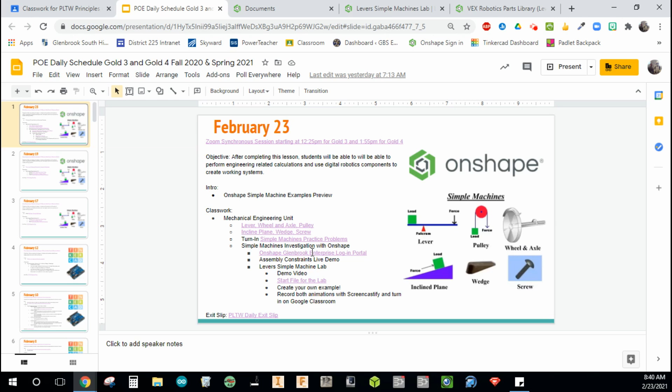So when I click on this link, you'll see it'll take you to glenbrook225.onshape.com. When you follow that link, that'll bring you to the enterprise login portal. If you were just to go to onshape.com on your own and try to log in, it would work, but that's going to end up being your own private account, your own private side of Onshape.

So please bookmark this, that way you don't have to come back to the daily schedule every time you need it. Bookmark it, add it to your browser links up here at the top of your screen, because you want to access Onshape through this link every single time.

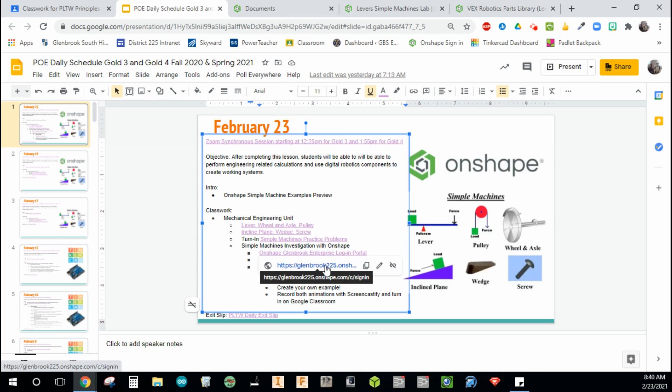When I click on there right now, it's actually going to redirect me directly in because I already have some tabs open, and I wouldn't like to start over with that. In any case, when you click on that link and you get logged in, your landing page should look like this. You'll be on the Documents tab.

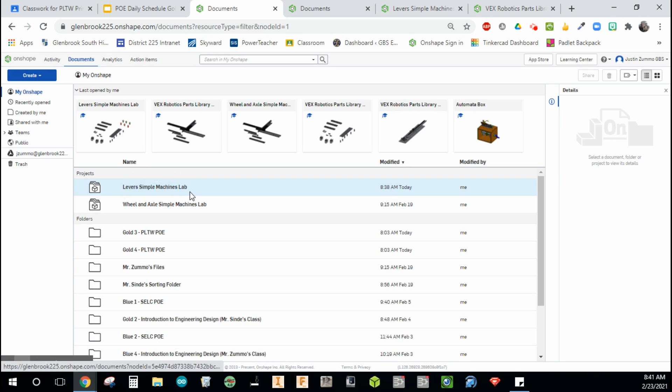Here you can see all of my files, all of my organization, all the different folders I've created for student work. This is the lab that we're actually going to be starting with today, the Levers Simple Machines Lab. If I click on that, there's just a project folder.

I actually ended up sharing this file with you all, so it should be in your shared with me section. But what you'd like to do, or what I need you to do, is right click on that start file and click copy workspace.

When you click on that copy workspace, take out the portion that gets added where it just says dash copy. At the beginning, please put your full name, first and last, dash space again. So mine's going to say Justin Zummo, Levers Simple Machines Lab. Click open, and that takes a minute to populate.

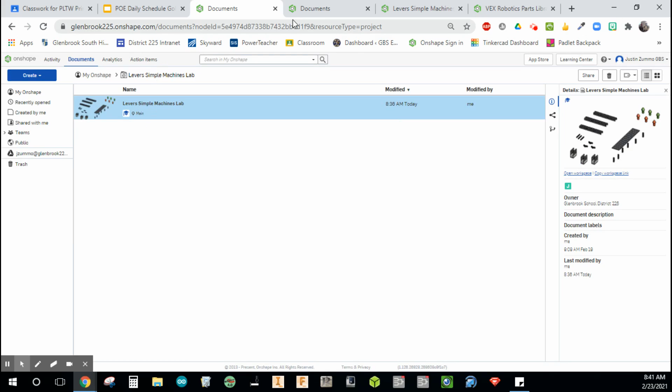While that's going, I can show you the other tabs that I have open here. This is what that file is going to look like, so I'll have my version of that open here in just a second. And then here's a completed version of that file. This is ultimately what your example should look like, or pretty close to it.

I already went through and picked out all the different Vex Robotics parts that you would normally want to use to build something like this in real life. The only thing I'm leaving out are the screws and the hex nuts, just because that's a little excessive for a virtual rendition of this. If you wanted to add those, you certainly can. You'll find all of that type of info along the bottom here.

So there are separate part studios, separate assemblies. I actually have one giant file with all the Vex Robotics parts in it, and what I've done is gone through and removed things that you guys might not need for each file, for each lab, just to clean things up and allow them to run a little faster and smoother. Otherwise they get a little laggy depending on how much you have in there.

This is a web-based application, so your computer, the device that you're using, and your internet connection will play a large role in how smooth this all works out for you. But in any case, this is my finished example.

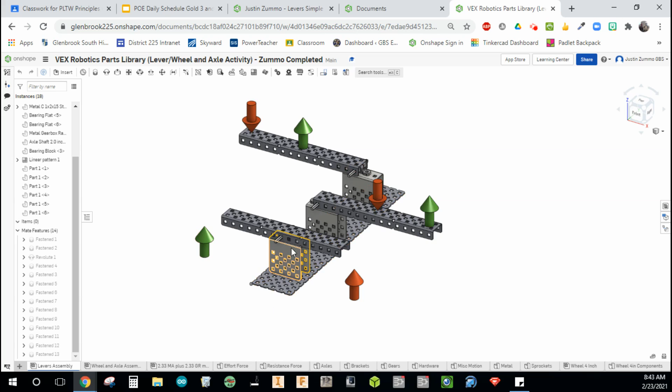So the first one here is a first class lever. And I have a second class lever because the fulcrum's on one end, resistance in the middle, effort on the outside. And then a third class lever here, axle on one end, effort in the middle, resistance on the outside.

So you guys can build something very similar to this, if not identical, by following the series of steps that I'm going to lay out for you here. Before I leave my finished example, I just want to show off a few things.

Initially what I did to get going is, and I'll revisit all this in just a moment, scroll up my list here. This metal plate will be the very first thing that we drop in, and I've actually fixed it into position. That's what this little icon is for, so it fixes the metal plate, and I did that right off the origin, the 0,0 location for this assembly file.

Everything else gets assembled and constrained to that metal plate. So I ended up taking one of these metal gearboxes, and inside of there, kind of hard to see on that first one, there's a bearing block down here on top of that gearbox. I also then fed the shaft through there, and those were the first three things that I assembled and attached to the metal plate for my very first example. I ended up linear patterning those three components: the gearbox, the bearing block, and the axle shaft.

By doing that, that allowed me to only need one revolute constraint, which is actually going to allow us to create an animation from this. So I suggest you guys do that too, and I'll repeat that process. I'll show you how to make a linear pattern, but duplicate those extra pieces. You do that because now I only need this one revolute, and if I go to animate that one revolute, since they're all patterned off of each other, it'll end up rotating all three lever systems at once.

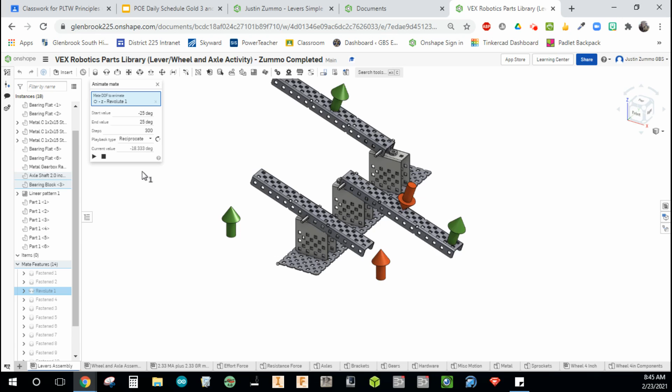For you guys, your finished product from this lab will be something like this, where you're animating it, and then you use Screencastify to record your screen and just show us the animation, kind of talk us through the process that you went through, and then you can turn those videos in on Google Classroom for credit. We'll come back to this at the end of the tutorial, and I'll show you how to get to this point from start to finish. But this is the end goal. Just wanted to show you this first before we start building one out on our own.

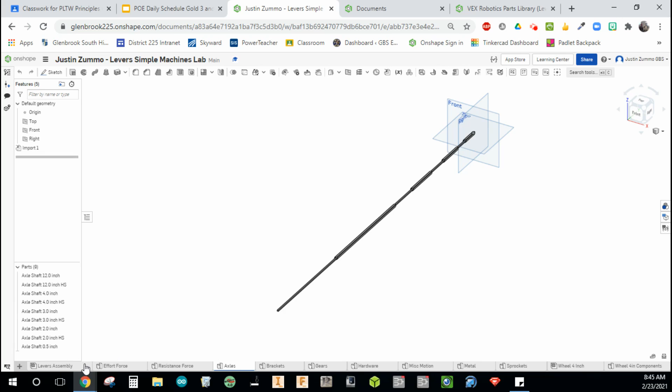So if I go back here now, this is the file that I made a copy of, has my name out in front of it. Again, a bunch of different tabs across the bottom here with different Vex Robotics parts. If you try to click through those, you can see what they've done. In Onshape, these are called part studios.

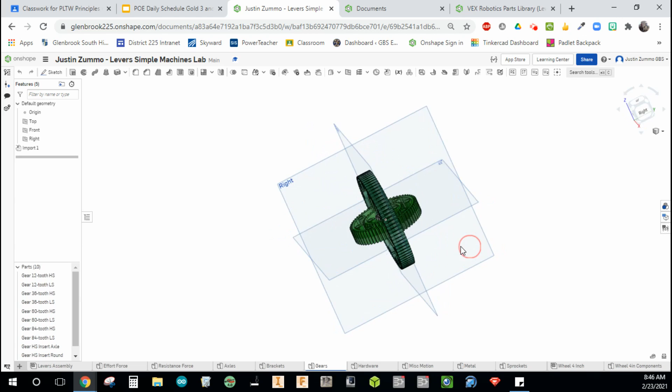These are where you can actually model your parts, do sketching and extrusions and revolutions and all that great stuff. But what I've noticed is people use part studios as a spot to hold all types of parts of similar categories. For example, this one part studio has 10 different parts on there, and they're all different types of gears that we have access to with Vex Robotics.

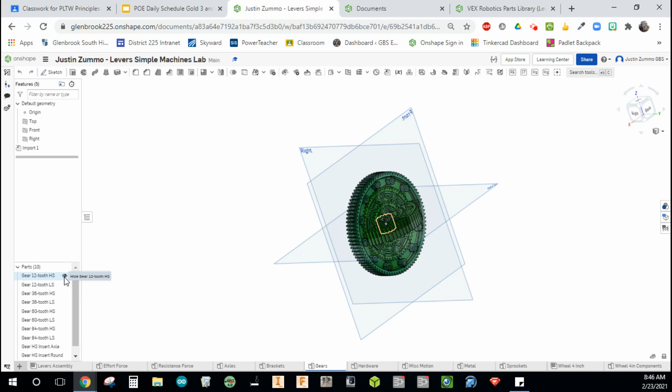So in my opinion, I would just do single part studios for single parts. I don't like that they're all kind of in the same space here. You could turn the visibility off for them and kind of reduce it down to just one part in the studio, which I don't know, it's a little against my own thinking for how to put things together.

But when you actually go to create the assembly and place parts from each of those part studios, I'll just give you a quick look at what that looks like. I've already laid out all the parts that you're going to need, but just so you can see, if I go to insert parts, you'll see the axles category, for example, and there's an arrow next to it. If I click that arrow, it'll reveal each of those different axle shafts that we have in the program. Same thing, if I scroll down a little more, find the gears, you see all the individual gears.

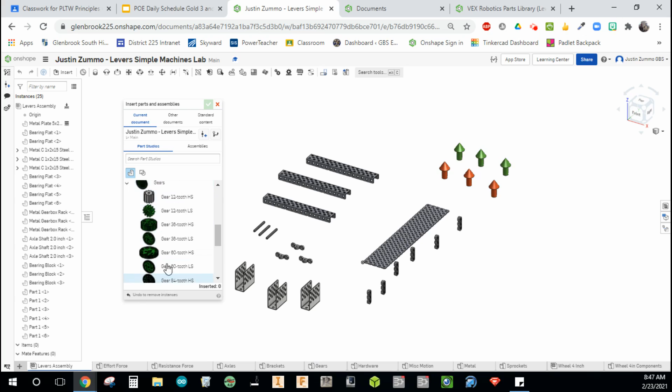So this is why they build it out the way that they do. When you open something, you get this nice drop-down list, and you can see all your options. But I would probably just do single part studios for each part, but that's okay.

Okay, so here we are. We're on our first assembly tab. Again, all the parts you're going to need to build the example are here. And just to show you a few bells and whistles, we have a view cube, just like we did in Autodesk Inventor, so you can still manipulate around the assembly by clicking on different corners of the view cube.

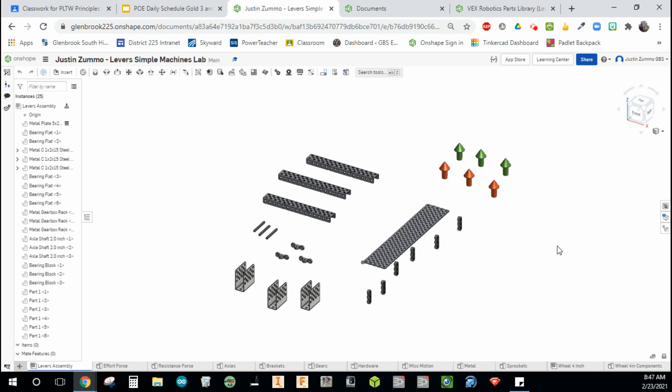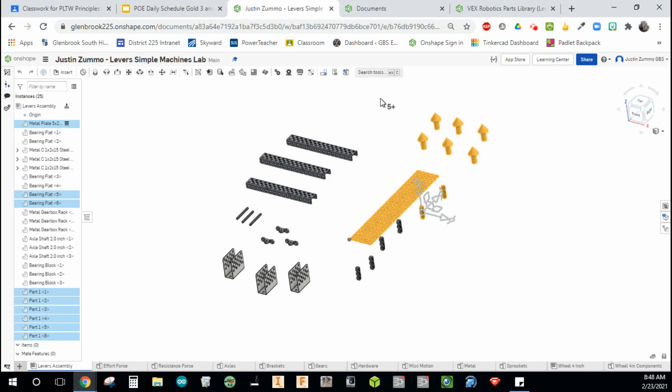You can also just click on the screen and rotate it, that's usually what I do. I'm using my trackpad with 3 buttons: left, middle, and right. If I click my right button, this allows me to rotate around the screen. If I click my center button, it allows me to pan back and forth. And if I click my left button, this is my selection, so I can either click and drag a box to select a bunch of things at once, or click on them individually.

Okay, so that's how we navigate the workspace, view cube, and the buttons on the trackpad. Over here on the left, you have all the different things inserted into the assembly already, kind of like our history. You can go back and see these parts, modify them, turn them on and off, whatever you need to do. Once we make our constraints, you'll see those populate towards the bottom of this list where it says Mate Features. That brings us to these different tools along the toolbar at the top.

This first category is used for constraining these parts together, and it's very different than what we used to do with Autodesk Inventor. I actually like it a lot more for that reason, because it's different. In Autodesk Inventor, we would have to do 3 separate constraints per part to lock it into position and take care of all 3 degrees of freedom. Well, here in Onshape, it's just 1 constraint per part, and it'll lock it in all three directions for you.

So very nice. Let's say 90%, maybe 95% of all the constraints you're going to do in this lab are going to be a fastened mate, this very first option. And as I showed you on the completed example, we'll have one revolute mate, and then you'll pattern that so it'll control all three lever systems at one time. We'll get down to touching some of these other ones in further labs.

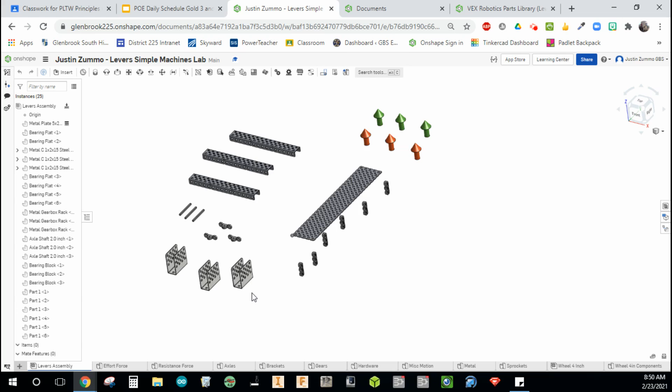So let's go ahead and begin. I'm going to set up one of these mounting brackets first and get that placed into position here on my metal plate. So I did mention the metal plate is already fixed into position for you guys, it says it right here, part is fixed, so it's not moving anywhere. Everything else can just get constrained directly to that plate or to the parts that are already attached to the plate, however you want to do that.

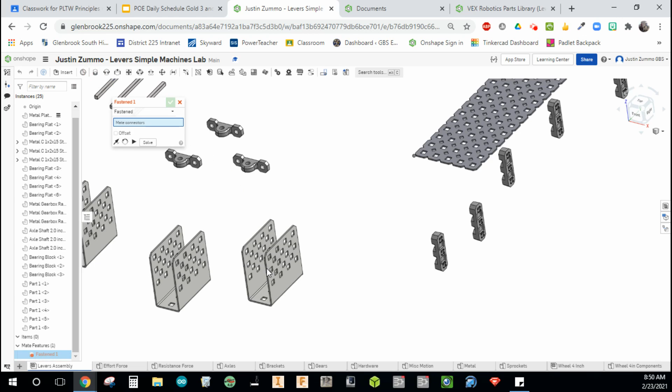So I'm going to click on Fasten Mate to get started. Another thing I like about this assembly constraints here in Onshape is when you start to move over to your part with your mouse, you'll see all these different nodes start to pop up. I think that's extremely helpful. So I can click on any one of these points and use that as a point of contact for my fasten constraint. What I'm actually going to do is select the midpoint of this very thin edge here on top.

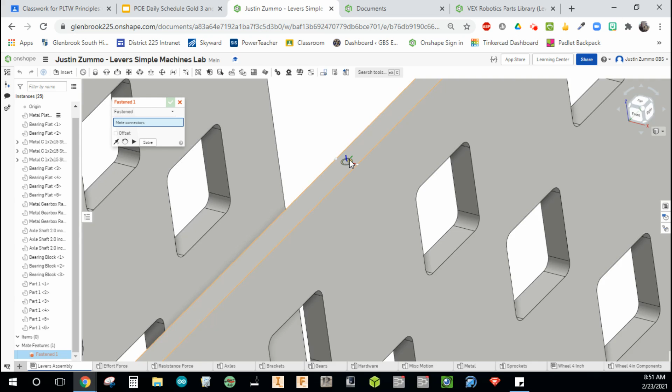If I move my mouse out of the way, you'll see right in the dead center there's a black and white symbol. It's actually called a centroid. We will learn about centroids a little bit later on this year, but a centroid is like the center of mass or the center of gravity for a shape or surface or object. So here it's telling us that's the dead center of that very long rectangle. So I want to click on that first.

And then if I move over to my metal plate here, zoom out, find it, here we go. I can click anywhere on here to get this thing mounted into place, but I am going to pick one of my middle points here, and just pay attention to what it's presenting to you. So I want like a flat one here. You noticed a second ago I kind of went to the line, it probably won't come up again. Either way, I just want my symbol to be flat on the metal sheet.

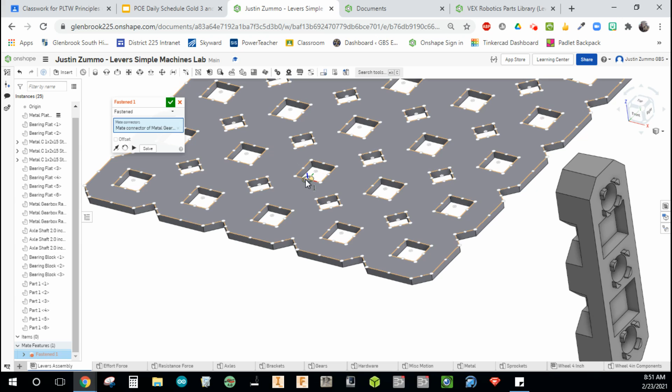So then when I click there, it brings those two pieces of metal together. You can tell it's upside down right now, so there are some ways to modify this constraint. I first want to flip it so that it comes back up top. And then just to go with the example I had already figured out, I would like to rotate this.

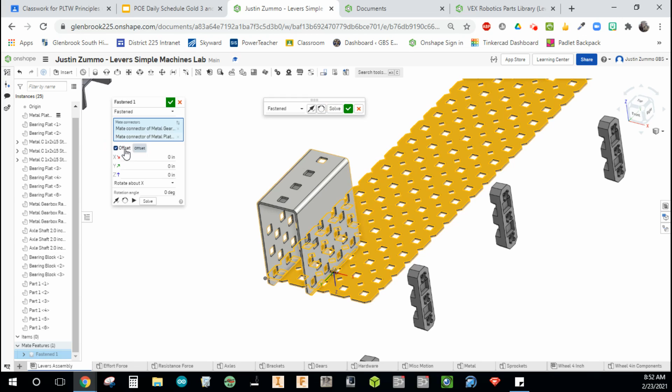If I want to rotate, I have to check the box for offset. Then I can specify rotate around a specific axis. For this, I'm going to rotate around the Z, and I'm going to do it by 90 degrees. So I just click inside the box there so that my mouse is not inside there adding the number. When I click that, it solidifies that - it rotated it, and it looks perfect. I'm going to hit the green check mark to finish that constraint.

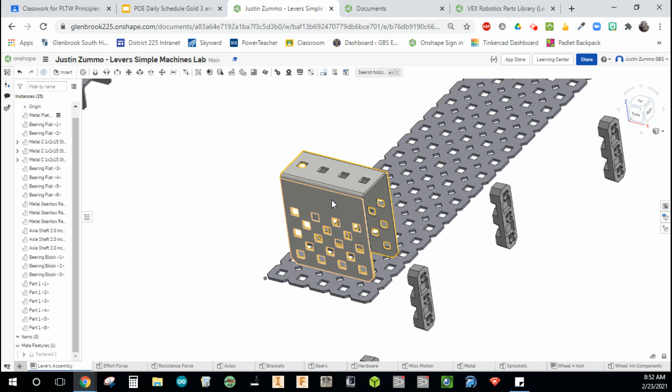So again, that was just one fastened constraint. And if I try to move this piece around, it doesn't go anywhere - it is locked in against this other sheet of metal. Now in real life this wouldn't work, right? We would need some type of bracket or something to make the transition between those two pieces of metal and to fasten it all together. But for our purposes here today, this will be just fine.

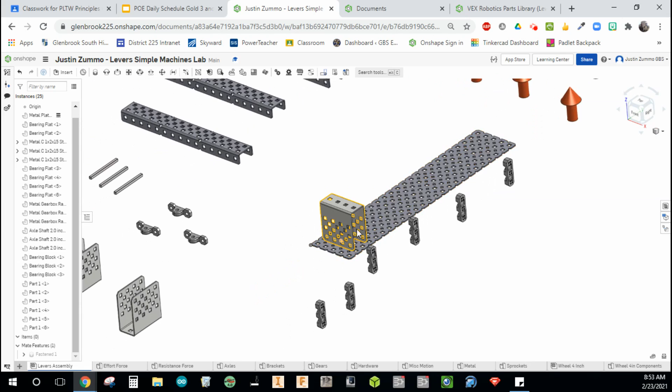So I have that gearbox bracket attached in the corner down to the left here, so I have room for my other two examples. Now I want to get this bearing block set into position right up top. The bearing block has two mounting holes, and there are four mounting hole options here on this, so I'm just going to kind of center it to the left a little bit.

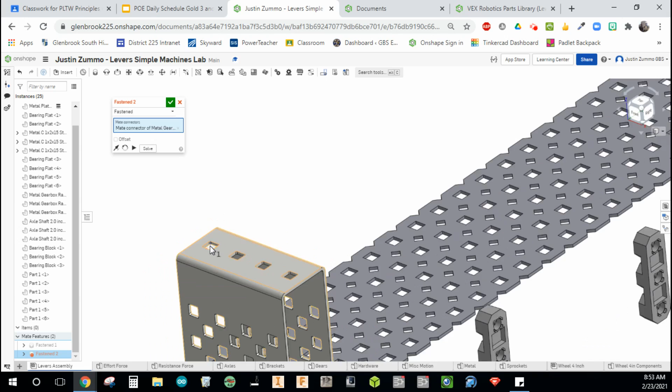Let's go ahead and do a fastened mate. This time I'll go to the gearbox first - doesn't matter what order you go in. So I'm going to grab the center point here for my first hole. And then if I scooch over, I'm going to rotate because I want to grab the bottom, and I want to find the center of this hole right there. Boom, click it.

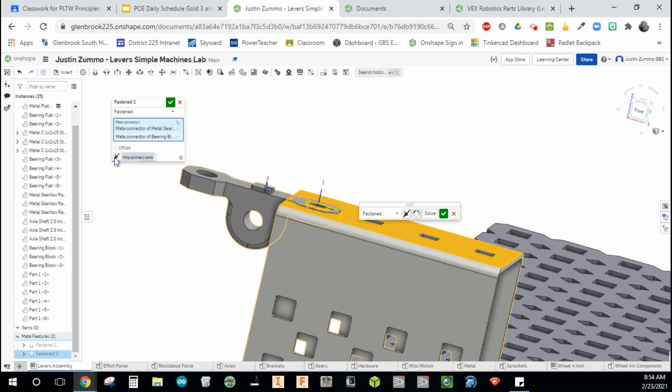Zoom back out, see what the result gave us. Pardon me, I meant to just pan the screen there so I could see that better. Okay, so again it flipped to the inside, so I'm just going to click Flip Primary Axis. It pops it to the outside, and it actually is in perfect rotation, so there's nothing else for me to do there. I'll just hit the check mark. Now that is set in position.

Okay, so one more thing that we can do here is actually add the axle shaft, and I'm going to put that directly inside the hole here on this bearing block.

There is more than one way that you can create these assemblies, but this is the option that I'm choosing to use and to share with you guys.

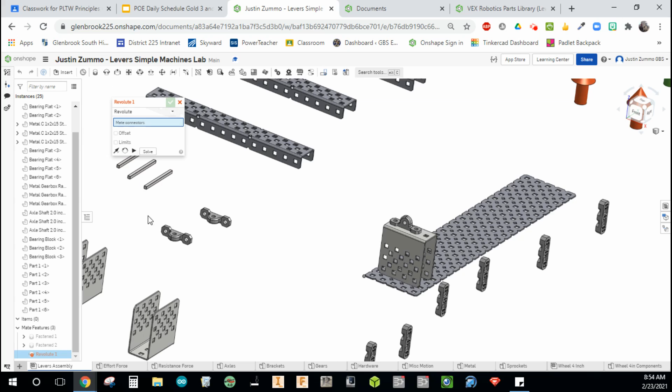I want this axle shaft to rotate as the levers rotate, so I'm going to do a revolute mate on this axle shaft here, and I'm just going to pick the endpoint. If you're patient enough, you can get the dead center of that to show up. I think I saw it there for a second. But I'll just grab the endpoint here, and then I can offset it into position to get it squared up nicely and centered nicely.

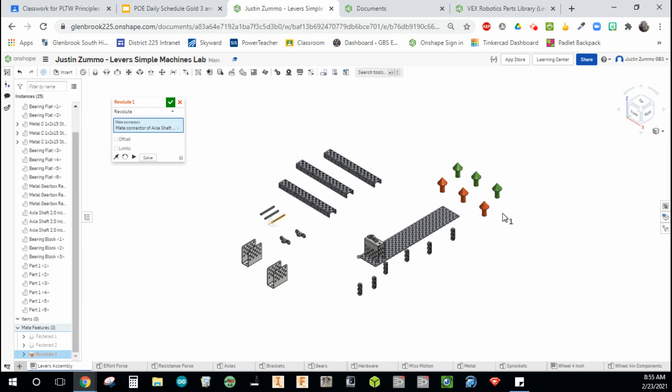I lost my rotation here, so I'm just going to go back to my perfect isometric view and zoom in on this bearing block. You can see here I made a mistake. I selected this edge, which is on a slant, and so the axle shafts actually went on a slant too.

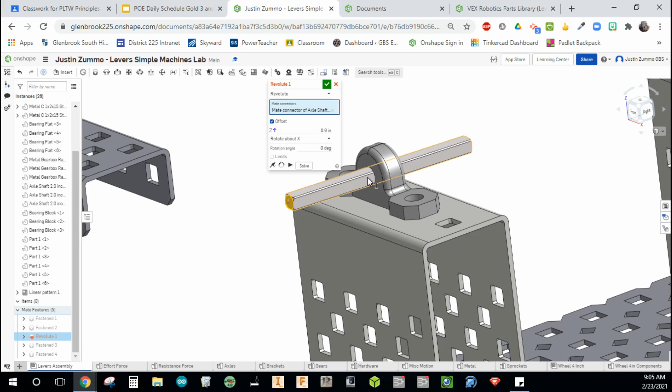So to fix that, I go back to my revolute constraint, delete the selection I had made from before, and then I actually want to grab the inside center of that hole. I wonder if I'm even able to do that here. Yes, I got it. So instead of grabbing the outside of that hole, you want to move over to the inside, and you can see right when I made that selection, my shaft straightened out here.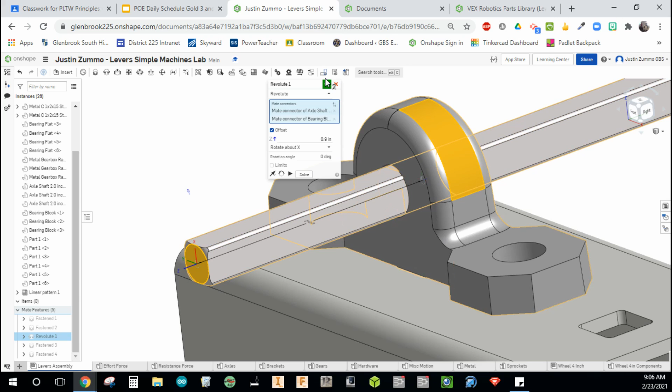If I go to my right side view, that also got repeated into my other examples. So sorry about that mistake, but you live and you learn, and that's part of our process here as we're learning, right? So again, do not click the outside surface of your bearing block. Make sure you find that node in the center of it so it's not on an angle and the shafts go in nice and straight.

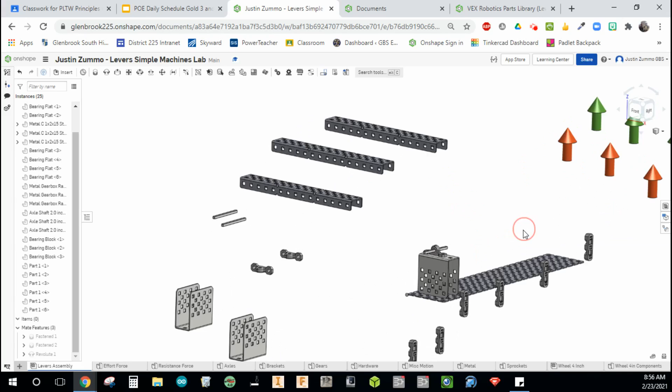So you should be able to click on that axle shaft and rotate it inside the hole, but it shouldn't go anywhere else. It should just be able to rotate, and everything else should be cemented and fixed and fastened into position now.

All right, so we got those three parts assembled to our plate. From here, we can cheat a little bit and do it in a linear pattern, duplicate those bases. As I said in my finished example, that means we can animate all three of these examples with just that one revolute constraint now.

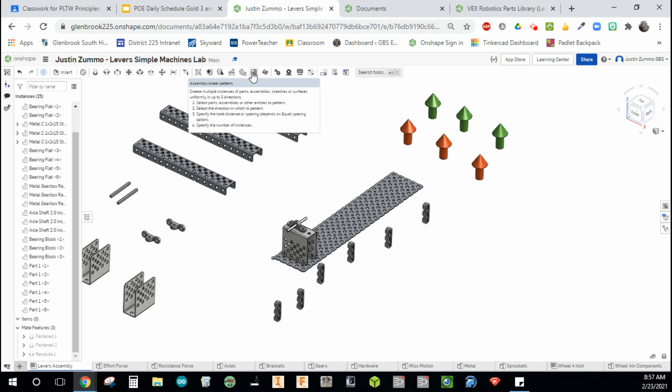So I'm going to go to assembly pattern, and what we want to do is select the instances to pattern. So I want 1, 2, 3, all three of those parts. Then I just have to click on the direction box here and tell it what direction to go in. Anything will do—I'm just going to select the side piece here to send it in that direction. Then you get to set the distance and how many. I want 3 of them ultimately, so I'll change that to 3.

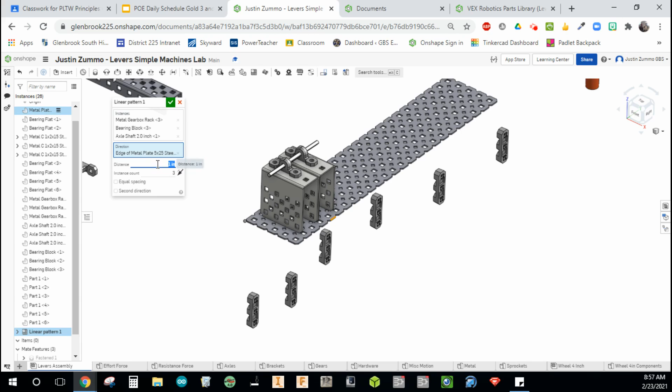And then I'll just type in a number that gives a little bit of space in between each of these and doesn't allow it to fall off the plate or something. So I'm going to go with 4 inches, 3 instance counts, hit the check mark. And again, if I try to rotate my one axle shaft, all 3 of them are rotating now.

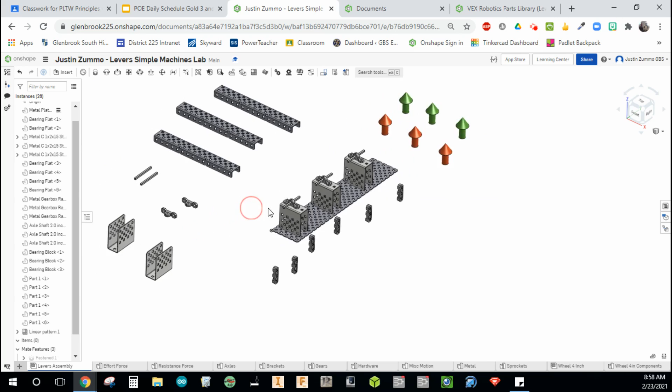Okay, so that was the base and getting all of that set up. Now we just want to go ahead and add some of these bearing flats to our C channels here, which are going to act as our levers that we drop on top.

Now, bearing flats are very important because this is going to make a rounded hole support for the axle shaft, just like there was a rounded hole here on the bearing block. Again, very important because all of our axle shafts are square and all the holes on our metal are also square. So a square inside of a square doesn't really rotate very well—very clunky, a lot of friction loss there. So we put these bearing flats on there just to give it a nice plastic rounded hole to rotate inside of, and it's working out a lot better.

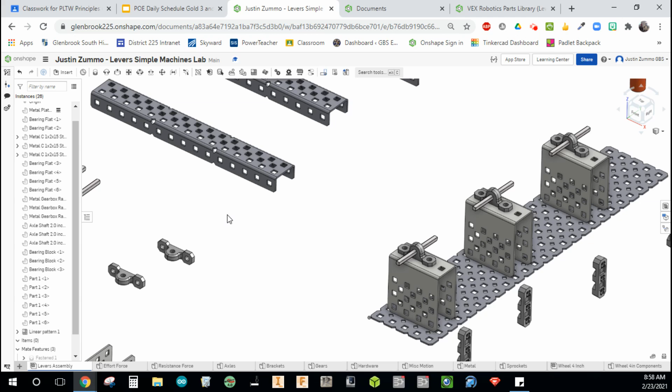So I'm going to get 2 of those mounted directly center on the C channel to create my first class lever example. So let's go ahead and do that. I'll pull up a fastened mate, and it doesn't matter which hole you pick, I'll just go with this one.

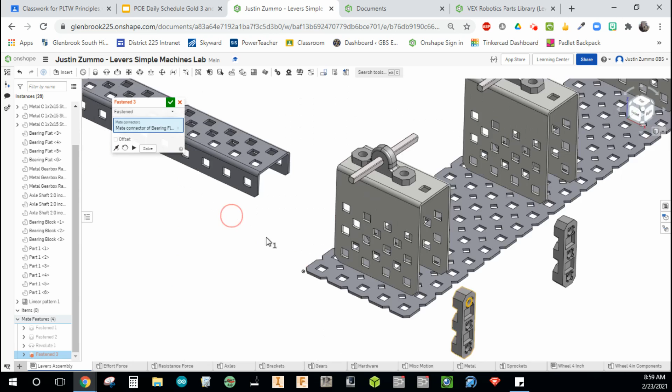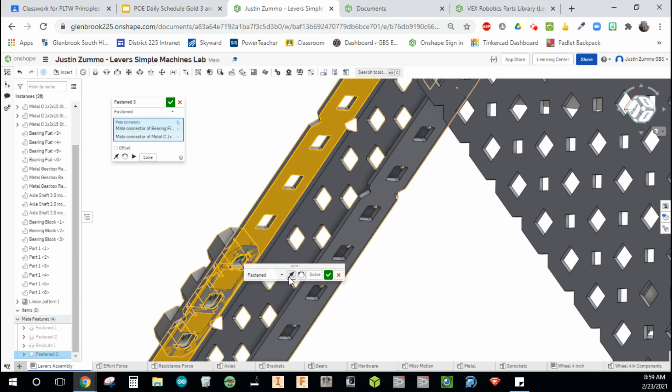On the C channel, there are 5 holes here, and I want that to be dead center. Since I picked one off to the side, I'll go one over to the left, and I want this inside edge. I think I might have to rotate slightly so I can get that to pop up. There we go, right in the center. Boom, it's flipped, so I'll hit the flip arrow and then it's in perfect rotation there. That's good, I'll hit the check mark. We'll do that one more time.

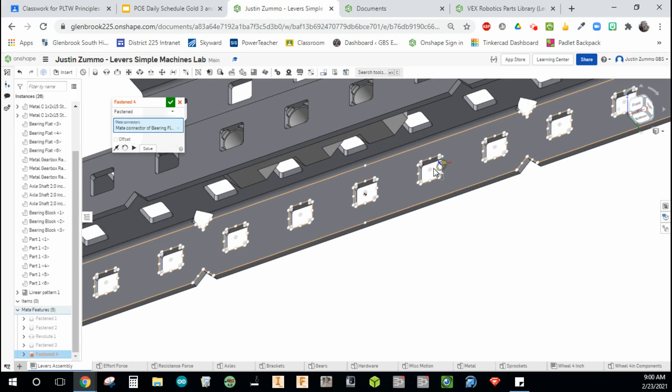I'll get one more of those put in there. I see one over here I can grab. Grab one of those, come back, rotate a bit, zoom in. I'm going to grab this one. Excellent, just need to flip it and rotate it. So I'll go to offset, rotate around. I think I want to rotate around the Z on this one, 180 degrees. Perfect, green check mark.

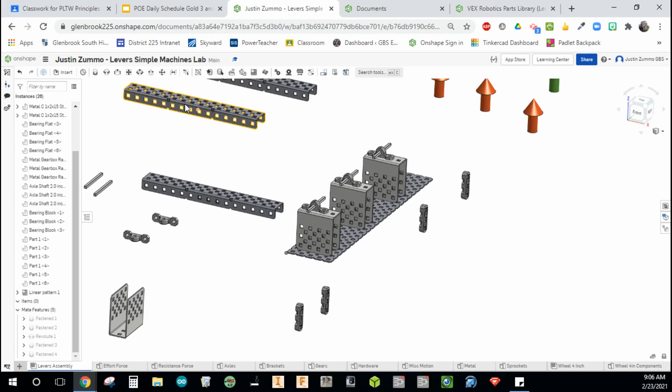That's in position, so now I can take this and land it right onto the axle shaft with a fastened constraint. Now let's try this again, do another fastened mate, and I want to grab this piece here. And on my axle shaft, I'll grab the outside. And as I was saying before, just play the offset game, get that put into position.

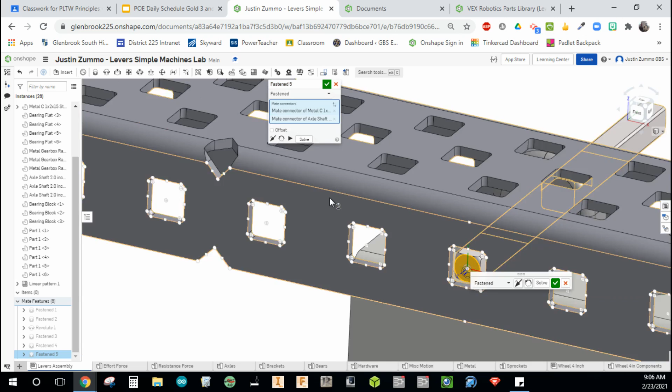So bring up offset, type in a value. Let's try 0.65 and see where that puts us. Hit check mark. Actually went in the opposite direction, that's always fun. So let's go back here to that constraint and type negative instead. Negative 0.6, let's see where that puts us. A little too far, just playing the guessing game here.

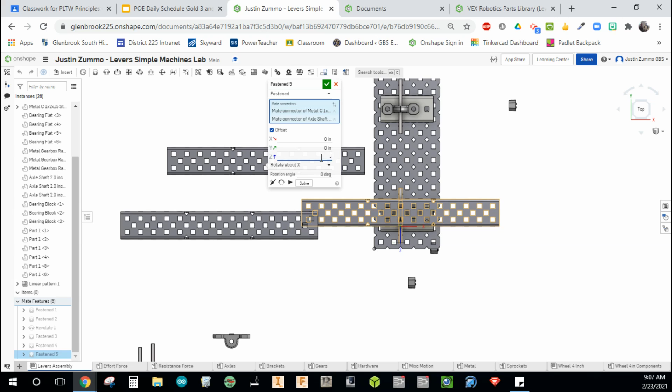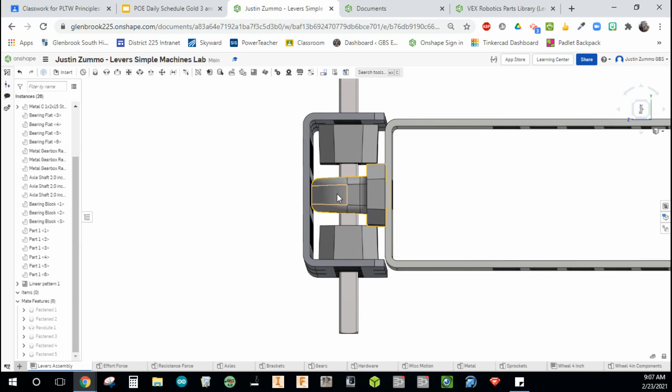Negative 0.5. And I can still bring it down a little more, so let's try that one more time. Negative 0.4. That looks about right, and if I just rotate to the side here, I can see, ooh, I like this a lot. There's just about a perfect amount of distance between the bearing blocks and the bearing flats. Shaft fits all the way through, and it might not be perfect. There might be a little intersection between plastic pieces and metal pieces, but for our examples and the purposes of this lab, this will be perfectly fine.

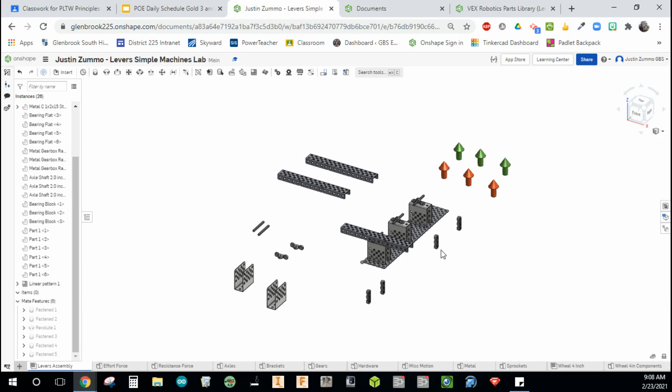Okay, so I got my one lever on there. Whew, that took some work. And what you guys will notice then is you're not going to need these additional components since we did the linear pattern, so you can play cleanup a little bit if you want and delete some of these things out. All right, not going to need these, not going to need these. Already got all the shafts we need.

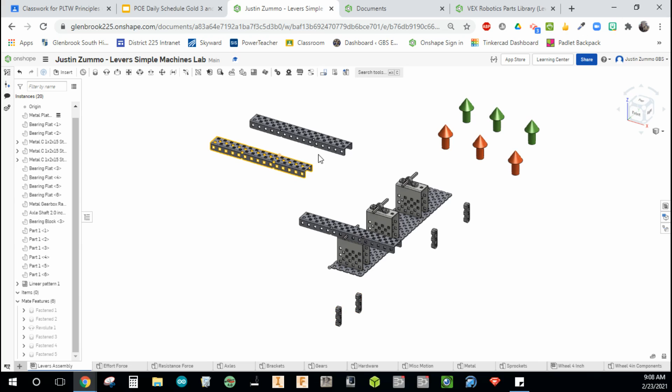Okay, so from here, you'd want to repeat this process, continue assembling these bearing flats to the metal pieces here, and create a second and third class example. And then the last thing that we can do is mount our arrows onto it, and that'll be real simple too. You just do a fastened constraint between the tip of the arrow and the center of a hole here on one of the metal pieces. And again, this will allow you to rotate one of them and have all of those shafts rotating.

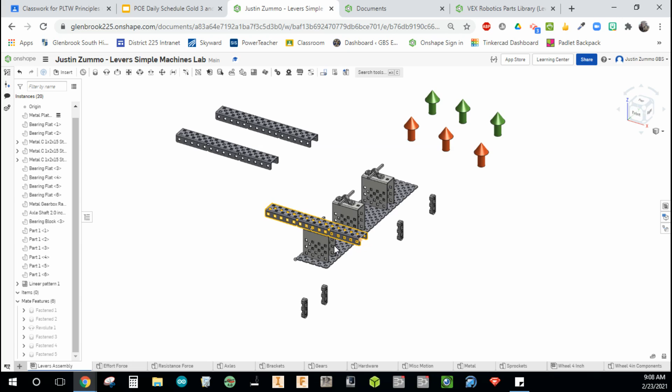You can see here that it'll rotate 360 degrees unless you actually tell it to be constrained within a certain limit. And so when you go to animate, that's where you can tell it to just do, if I go to animate here, you can tell it to go between 25 degrees and negative 25 degrees. Maybe bring steps down to like 50 or something. And then if I hit play, it'll kind of just seesaw back and forth there.

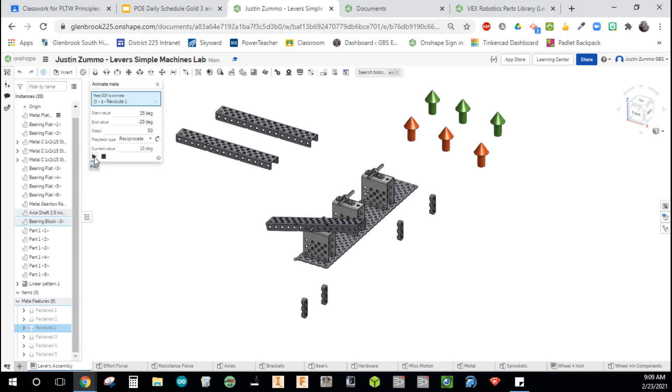So this is ultimately what I'd like you guys to do, as I said before, is you'll have a finished example like this. When you animate one of them, all three of them are animating along with that.

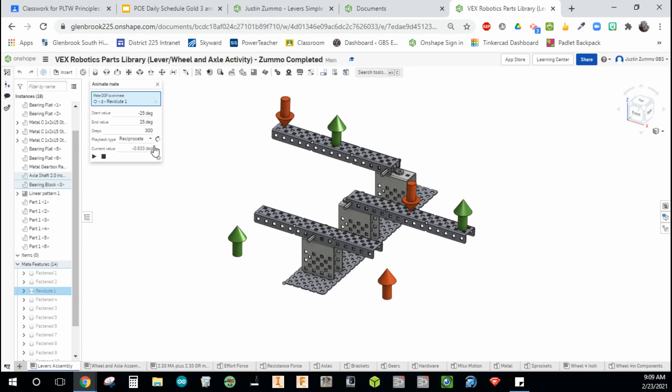Hopefully you enjoy getting started with Onshape here and building out our lever examples and simple machines.